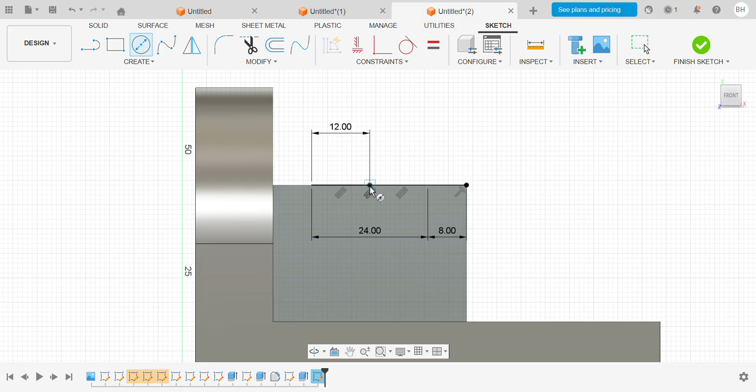Now let me continue from where I left. There was a bit of confusion there. I was trying to say, after getting this center, it's easy to take a circle, then drag it up until you get to this point where you're having your 8. After that, it's going to be there again, and you get 24 there. That was the confusion that I made.

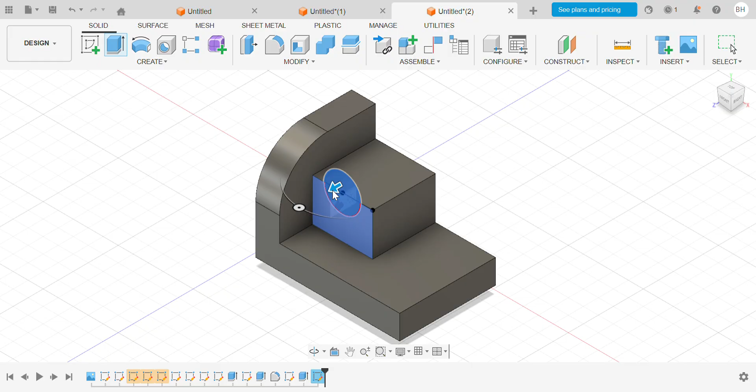So you finish sketch and go in this orientation, and now you take extrude, extrude, and extrude. Now you change direction. Here we have an arrow showing direction, and by this you're going to see an option for cut here, and the distance.

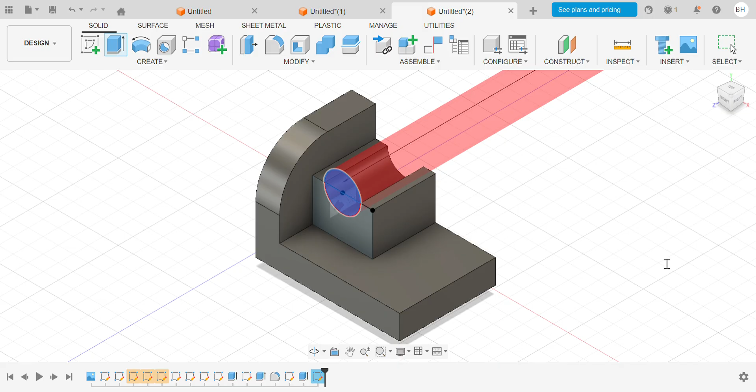Let me put the distance that is above. We all know the distance was 40, so we can put 50 and do a cut operation and click OK. Now we are here, and if you look at this, we are now here.

We are left with two pieces of this drawing, which is this line that is 12 from here to there. That's a rib that is supporting this piece, and to draw that, we turn our drawing, and from this side we click it, then create a sketch from that side. Before we create that sketch, we need to see the dimensions.

So let me go in this orientation, then zoom. We can see that this line is coming from the top here to the end, so there's no need for us to put dimensions there.

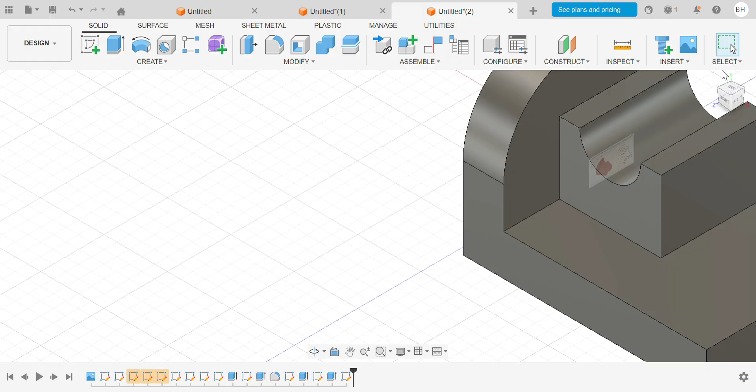So we just turn our drawing by orbit. You press the center button of your mouse, then shift. You can get orbit and turn it, or you can just come here and turn by clicking the other corner of the view cube, just like that. If you click this corner, you are going to see the other side.

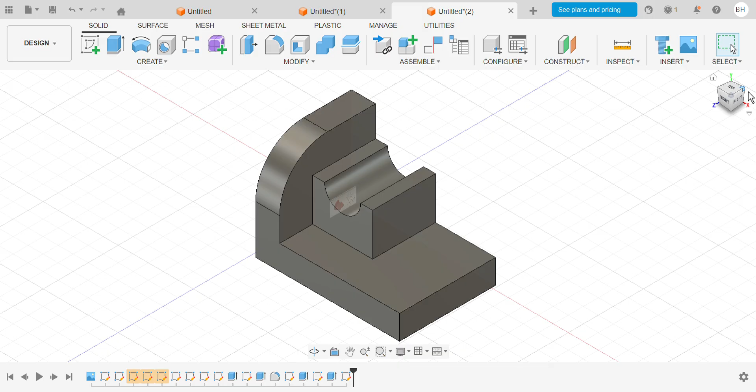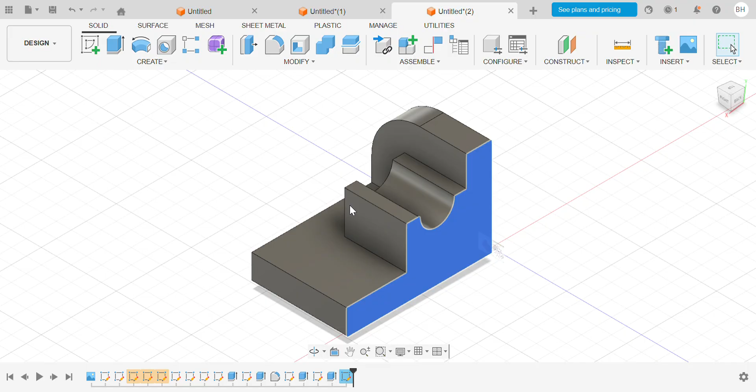Then click this, then create sketch. Sorry, if you click this, let me click OK first. I'm trying to find an option to create sketch. This one, edit sketch. Alright, I've used edit sketch and it worked.

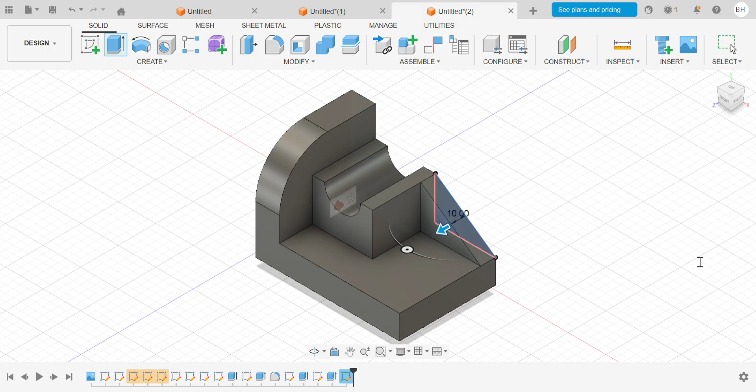So now we are going to draw a line that is coming from this top corner to that. Then you finish sketch, go back to home, and the distance extruding this piece is 10. Going in this direction, then you type minus 10, stuff like that, and we are done with this piece.

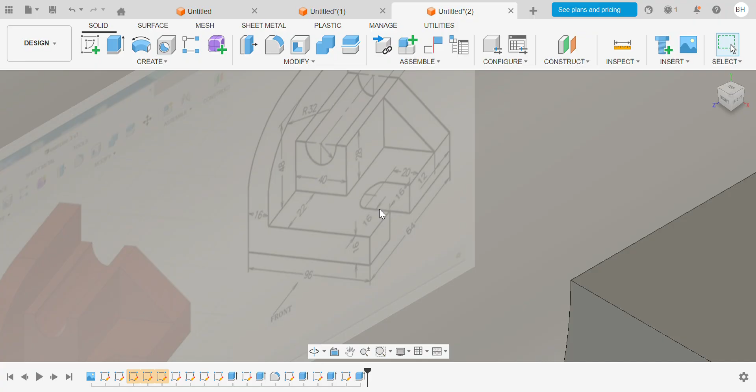If we look at it like that, we're going to see that we are left with this one, which is 16, and 16 from here, that's the distance, then 20 to there. Then we also have a fillet, a circular piece here that is ending here, that is maybe, I'm sure it's 16.

So what you do is you come over here, click on top, create sketch on top of this face, and we need the center for this one. It was 64 divided by 2, so 64 divided by 2 is 32. So a line from this corner, and it's 32.

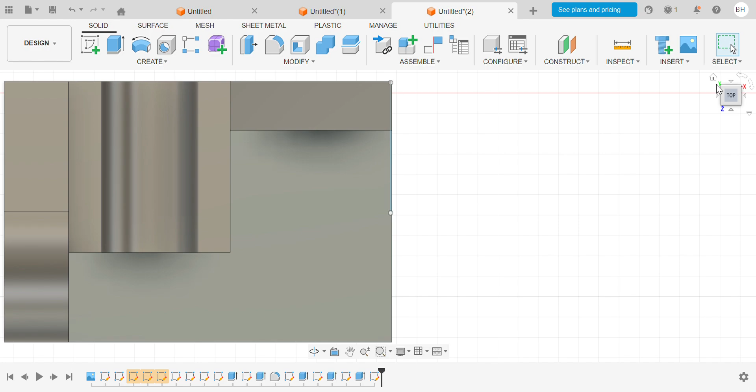We are now having a center for this, and from here we also want a distance. So let me finish sketch first, go back here. I want to zoom so that I can see.

So it's 16, so it's 8 that side and 8 that side. So I need a line that is going there, that is 20. So I'm going to do this. You need to take note of your dimensions.

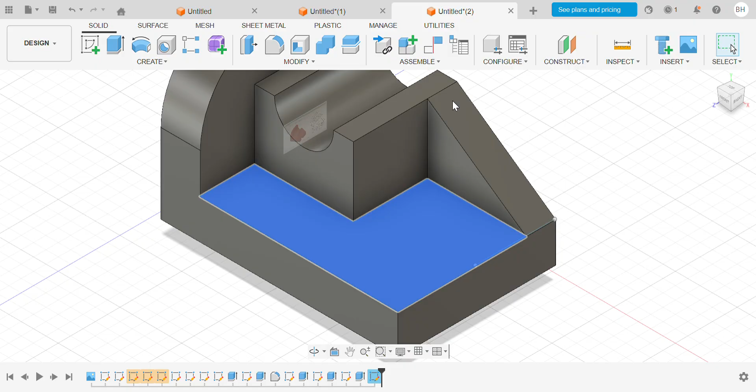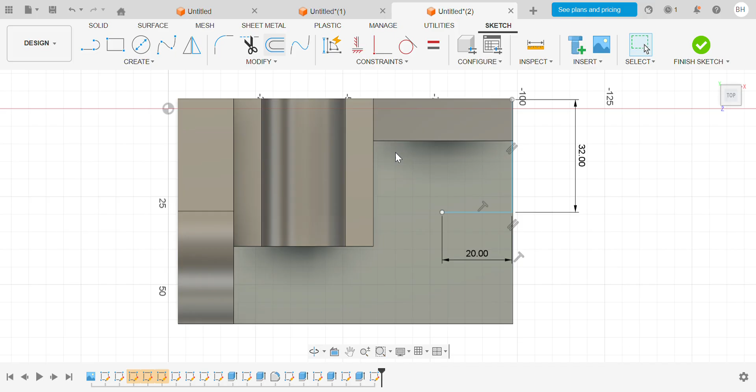Click OK, and offset again from here to there. Alright, so it's offset, select, we change direction again, and 8.

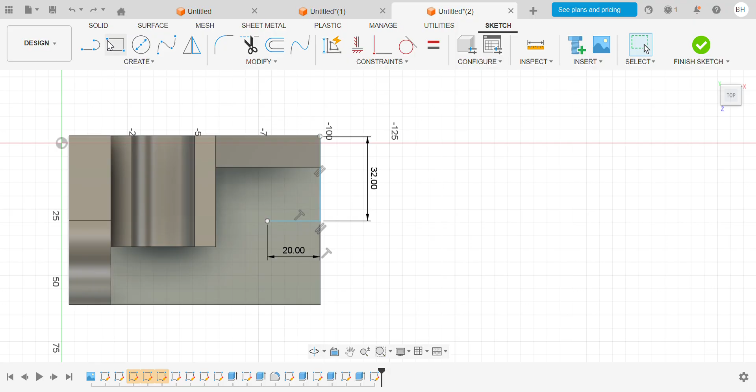Alright, it's refusing to give us an option to do an offset. So what we can do is we can just come over here. We know from here to there it's 8, so we just show direction, then put 8, then press enter.

We know we now have our 8 there, and again another line that is starting there, and we have our 8 going in that direction. It means that if we can draw a line from here to there, make sure it's straight to there, and again another line from there.

This one is not there. A line from here to there. Alright.

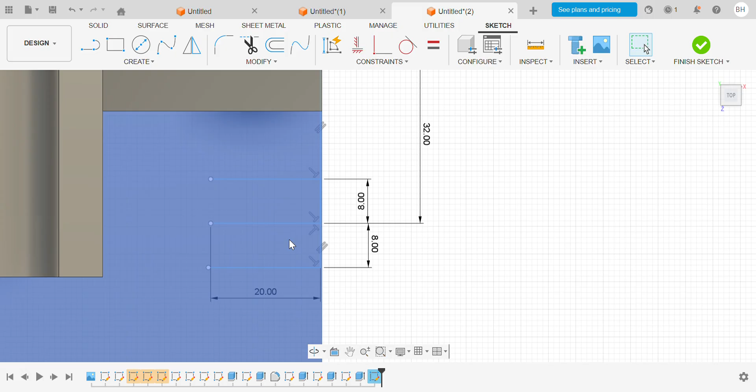Given that we want to finish this, we can delete this. This line, the center is no longer necessary, and this line again is no longer necessary. We're left with that line, and we can have a fillet under modify, fillet for this line and this line.

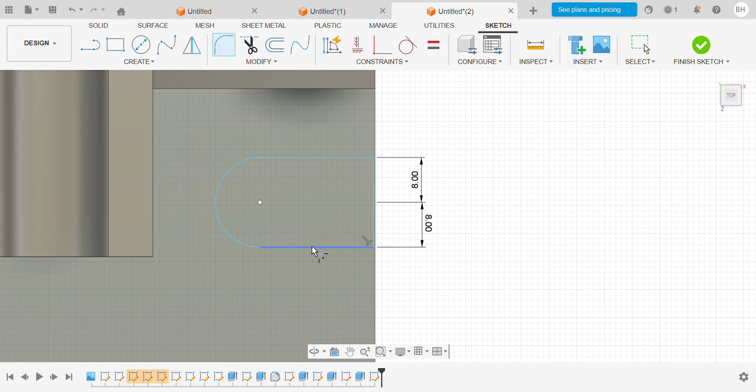It automatically gives us a curve, and after doing that we can see that this line is not at the end. We can delete it so that it gets at the end. Then extend this line a bit up until it gets through, because we want to cut stuff like that.

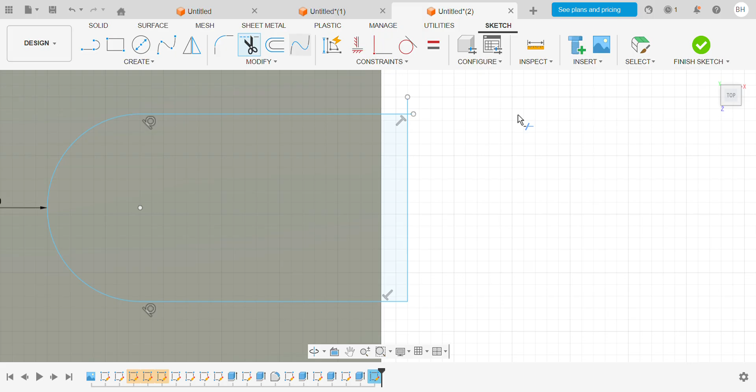And from here we can actually let me try and connect this to there. After doing this, we take our trim, we remove this and that again. Finish sketch, we go back to home, extrude, we cut, and we want an extrusion that is cutting through all like that.

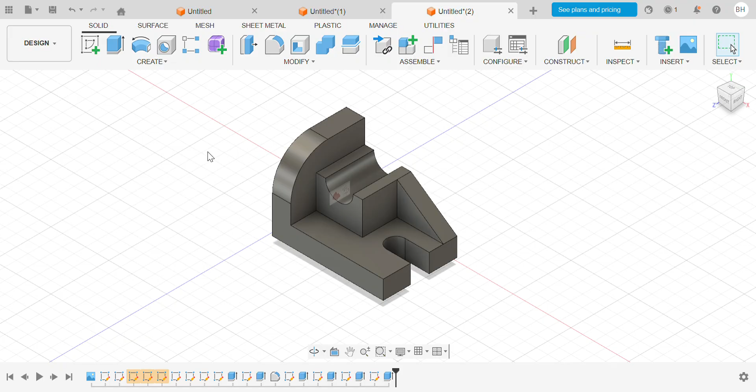The diagram is complete. If you want to put material, play around and change materials on this design. That's design number 1. If you zoom it, you can see that we have this option and this option and this and this. So that's how you do this stage by stage.